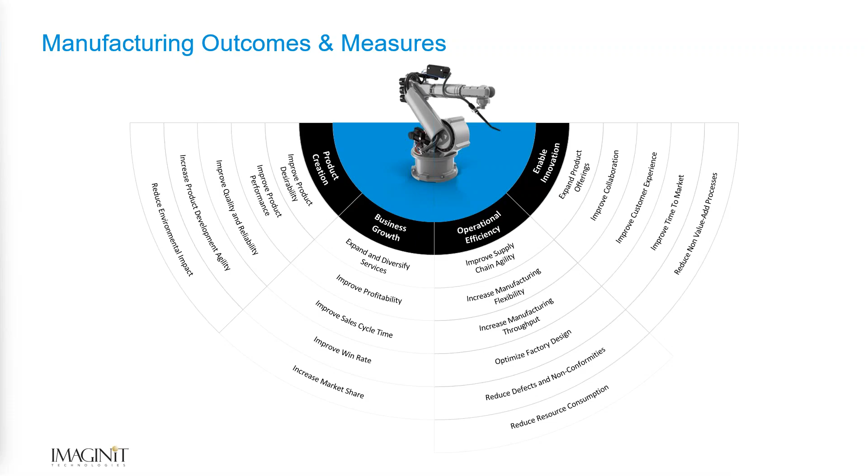All right, I have two more things, and then I'm going to turn it over to Tim. He's going to get into some more fun stuff and show you some real world examples. But the one he's going to walk through is WireCrafters.

So let me just give you a little background on them first. I'd say the ability for companies to transform has really knocked down all the barriers. It used to just be really big companies that could do that, but now those barriers have really been knocked down. WireCrafters is not a huge company, but they've invested in a digital transformation pretty much front of the house to back of the house to stay a market leader.

And they're not a huge company, but they're a mighty one. They are so good at what they do. And for them, their pressure was they had to do several hundred quotes per week with a relatively small team.

Years ago we had built them a 2D AutoCAD-based system. They outgrew it, so they needed a new way. Their goal was to produce high quality proposals and products while being able to account for many special site conditions. They go into buildings, so there's all kinds of weird stuff that happens.

Their transformation really included standardized engineering tools—that's where we started—for flexible 3D design, fast web-based tools for their sales team, automated manufacturing documentation, and then a web-based configuration and model viewer.

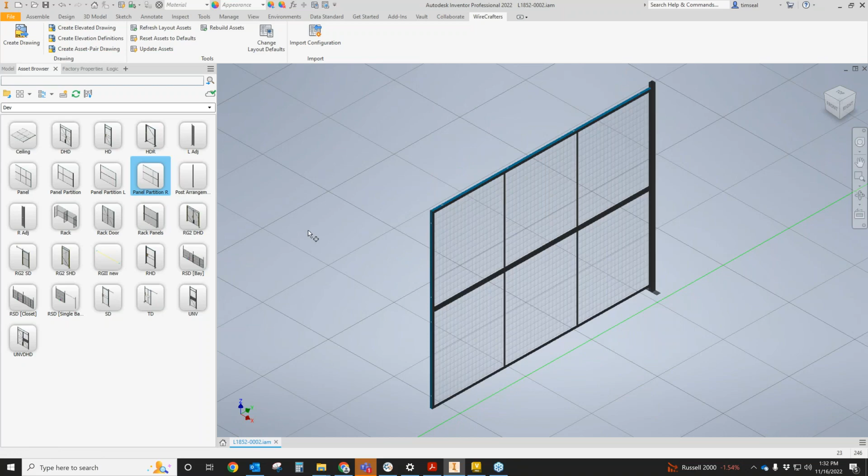So as you can see on the left-hand side of my screen, we have their product line built inside of Inventor factory design utilities. They created a library of their standard components. If you've ever used factory design, it's a simple drag and drop method where I could drop different size partitions into a design, orientate them how I want, and put the next partition in, and they would automatically connect together based off of how the system is designed. I've got a whole library full of different assets to choose from.

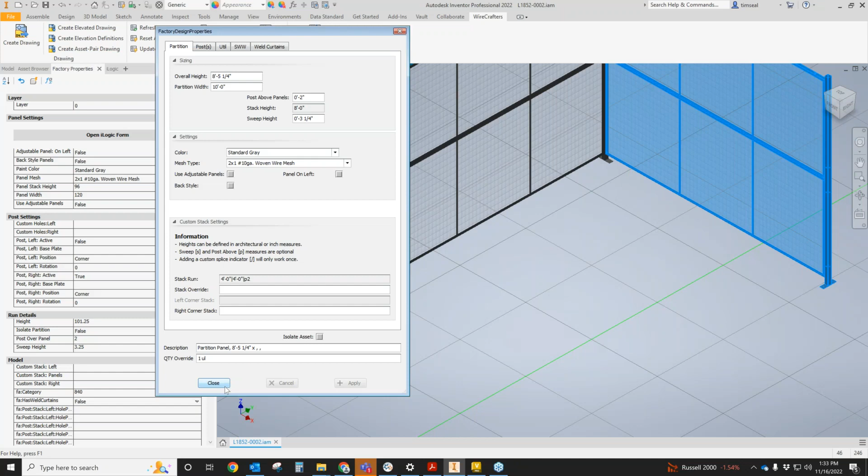Each asset, once placed, is configurable through a form. This whole process is quick and dirty, just drag and drop all the information necessary to build the component or make any modifications I'd want. I can fill out the form, hit OK, and have the designs change on my screen. Then it was a simple process where I could click a create drawing button, click a face, and it would make a drawing for me.

So we spent the first phase of this project basically building up one of their product lines, so that engineering could be quicker and create these takeoffs, instead of making it manually. We actually have a button, which I'll show you here after the web configurator part of what I want to show you.

It would automatically create this takeoff. Part of the process of creating the takeoff, not only did someone manually create it, but they had another person that had to check it. So from start to end, once something hit engineering, it was a week - 5 business days was considered a quick turnaround.

With 50 orders a day, processing 1 package a week, you can see how that could really affect lead times and be a really slow process. So again, we actually built the engineering front end up first - consider that like the engine we can use to produce packages. We turned that 5-day process down to, at tops, half a day. When something was created, a drawing was produced, and you hit a button and the engineering takeoff was created.

The next step of our process was to build a web tool that their national sales team could use, instead of making hand sketches and then coming back and manually entering a quote inside their ERP system. We created a web-based tool where all you need is a login and you have a quoting tool.

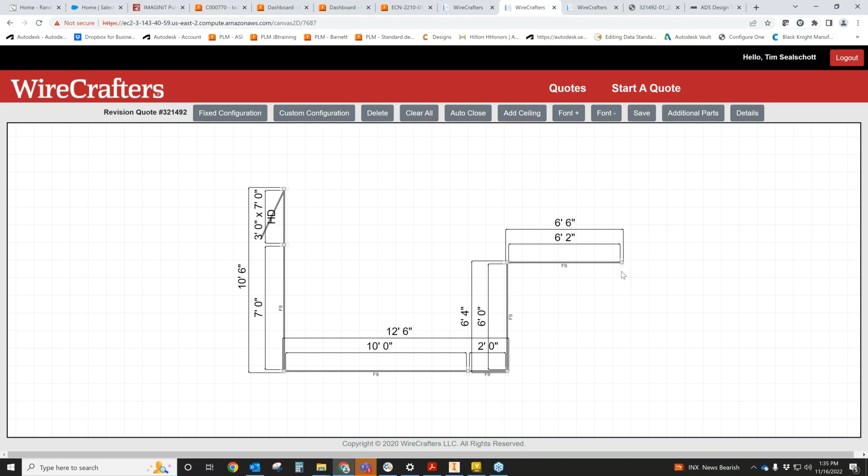So I could come in here, start a quote, and it goes into a layout mode where I've got tools to build a plan view of what my layout should look like, and quickly modify it by clicking on different areas and adding on to my partitions, like adding another partition, another door, or a wall. I've got ways to create standard configurations like box shapes or L shapes, depending on how you want to create those different shapes.

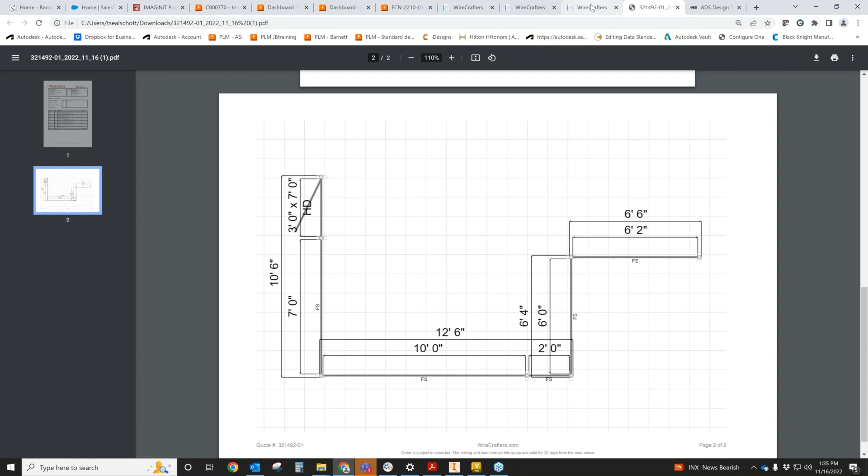From the layout, I'm able to generate a bill of material based off of that layout, and I'm able to download a quote. Based on the information, it quickly creates this quote and gives me a little snapshot of whatever the layout was, along with the ability to download what we call engineering data.

Not only is this quote created inside this web system, it's actually integrated with their ERP system. So as they're entering this information, it goes into the ERP system. If that quote becomes an order, an engineer can come to this tool and download the engineering data, which is just a text file - basically the recipe of whatever that item was when it was quoted.

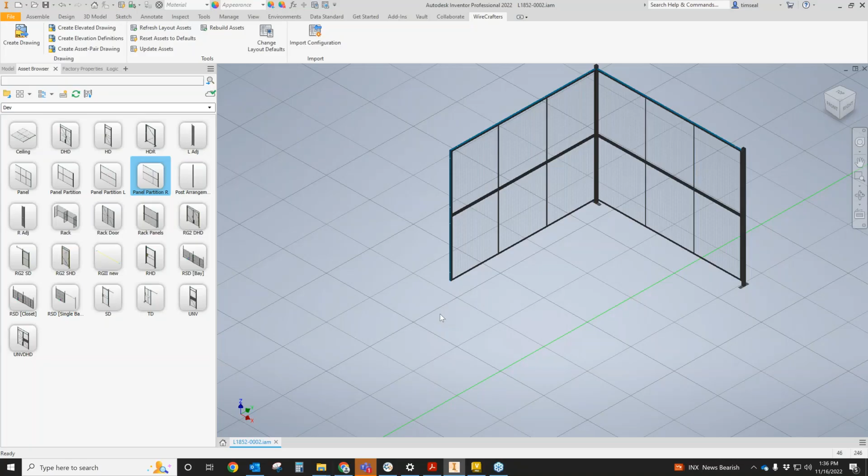From the Inventor standpoint, we built a little plugin inside of Inventor where I can import that file. The layout is just a text file - it's the formula that'll quickly go ahead and design, lay out, and draw the partitions for me with whatever the design criteria was that was inputted from the quote.

Everyone knows that something that's quoted may change or need to be revised a little bit. So we've got tools in here, like I showed you before, where I can come in and quickly edit. Let's, for example, change the width of the door - instead of it being a 3-foot wide opening, we'll make it a 5-foot wide opening.

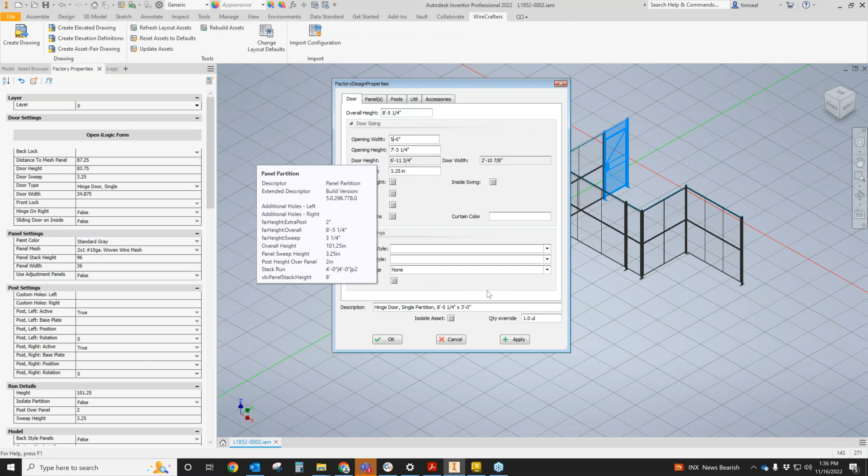We may need to add another panel to the corner here for their design. And then that needs to be a custom.

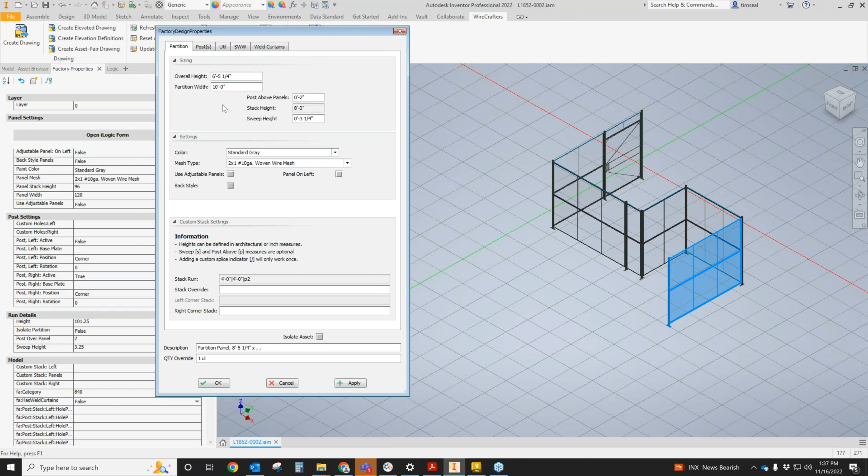So basically when we drop these things in, we call these stock sizes, meaning it's something they actually inventory and store on the shelf. So any changes we make to the system, they consider that to be non-stock, and there's got to be some customizations made to it. We want to keep track of those and add them to our takeoff sheet.

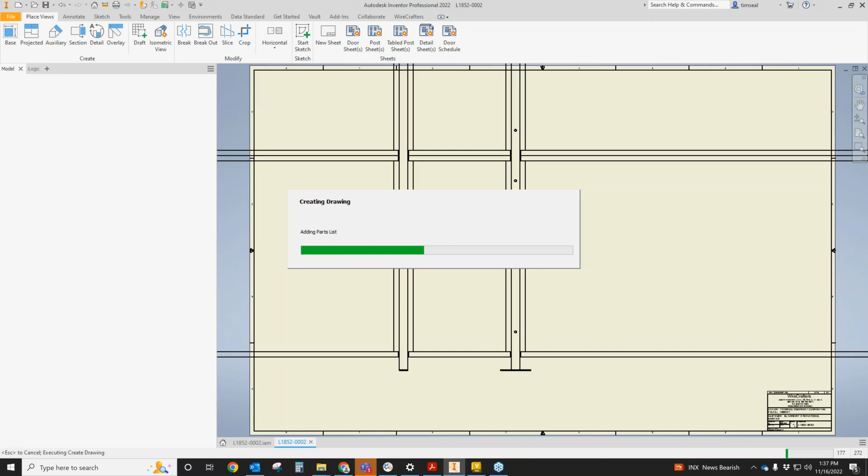So now that I've got my design pretty much completed, I can quickly create a drawing of it, pick a face that I want to use as my front view, and our automation actually goes out and creates a new IDW with a customized bill of material of stock and non-stock components, an orientation or plan view, an elevation view, an isometric view, all fully dimensioned and tagged, ballooned if you will.

And then we have the ability to come in and create some custom drawings. Like maybe we want to create a door schedule, so that'll automatically add a list or a schedule of all the doors in my drawing.

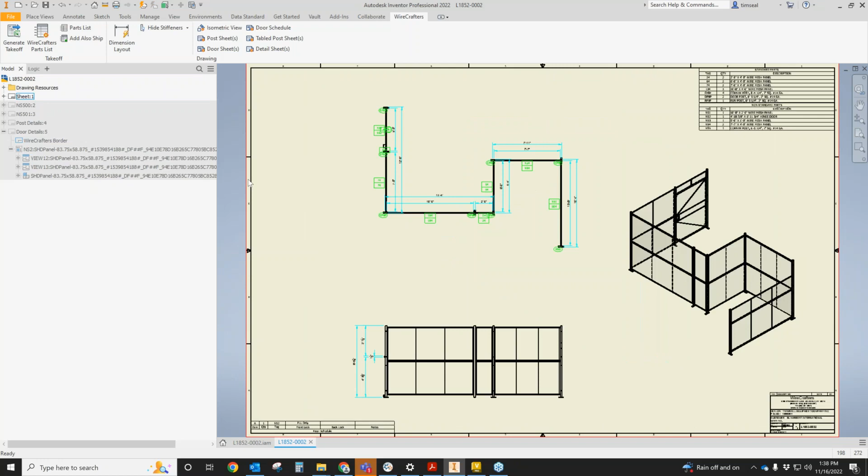I can create detail sheets of anything that's non-stock in my layout, anything that's non-stock of my post, anything that's non-stock on my doors, right? Fully dimensioned layout, fully dimensioned, bills of material for non-stock and stock items.

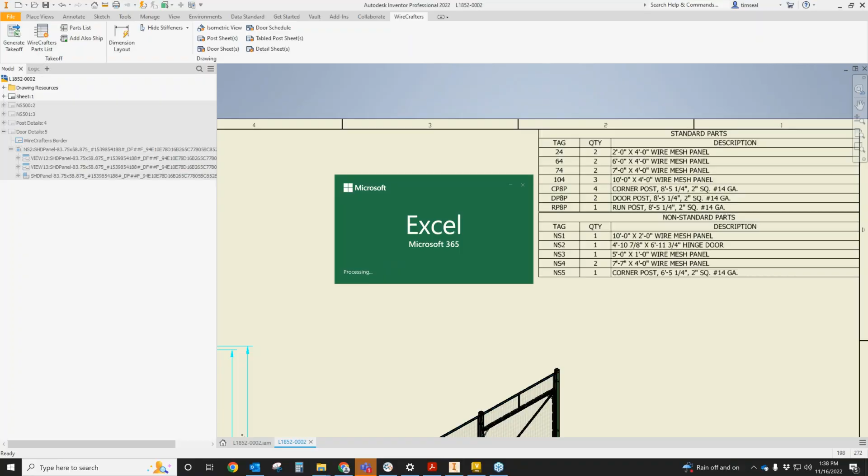And then the real big improvement that we made too is this whole idea of creating this takeoff sheet. So with one click of the button, based off of all the metadata that we stored inside of our libraries and our system, we're able to extract that information.

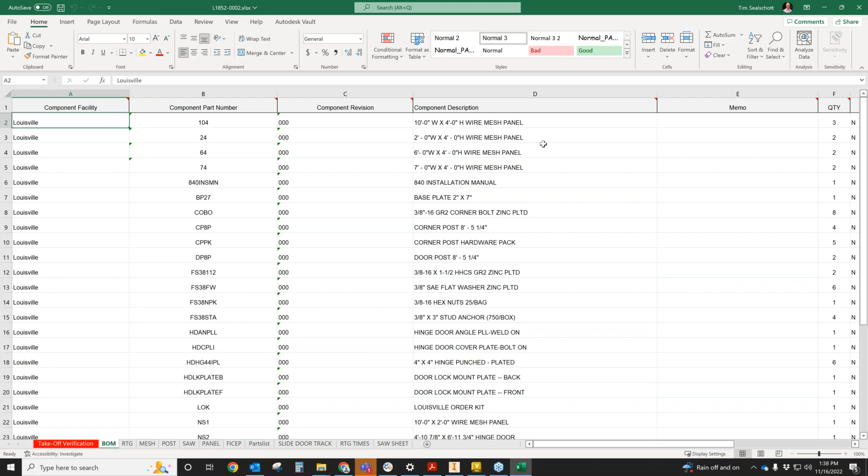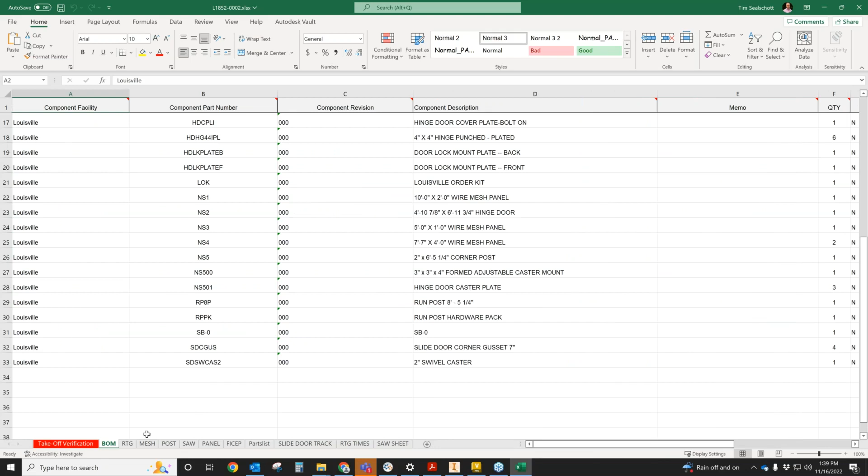And they used to build this thing manually. Just picture this, right? So here's our bill of material with all the components necessary to build this layout. And like I said, with extra hardware or installation that may not even be in the model, but we've actually got it configured so it shows up, along with weights, quantities, group codes. All the information necessary for that packing list.

We create a little routing sheet, so on the manufacturing floor we can kind of estimate the amount of time it should take and what needs to be built for each one of these operations. A list of all the custom mesh sheet sizes that need to be cut for this layout.

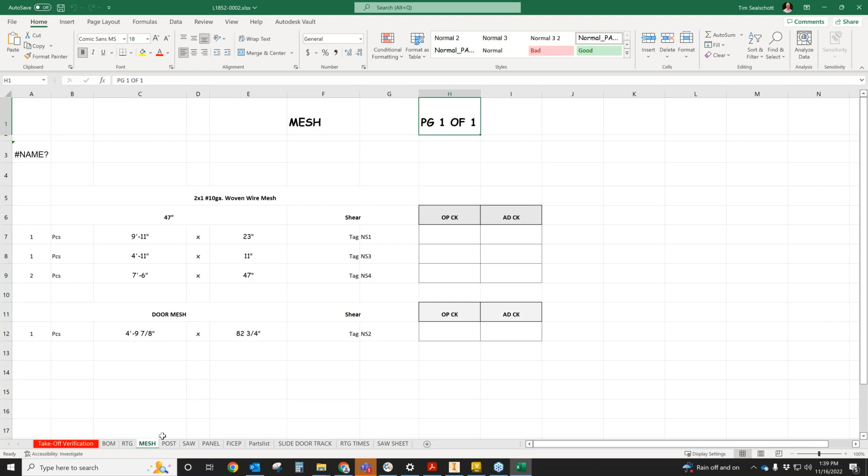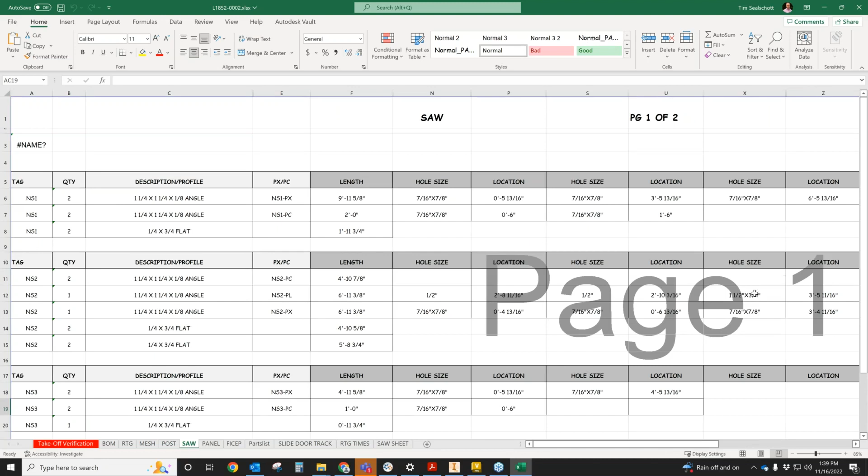A list of all the custom posts, which need to be cut and drilled for this layout. All the structural steel shapes for each custom partition, so you see all the angles and what needs to be made for all the non-stock components, plus where their holes go and what their hole sizes should be. And then a bill of material for each non-stock panel.

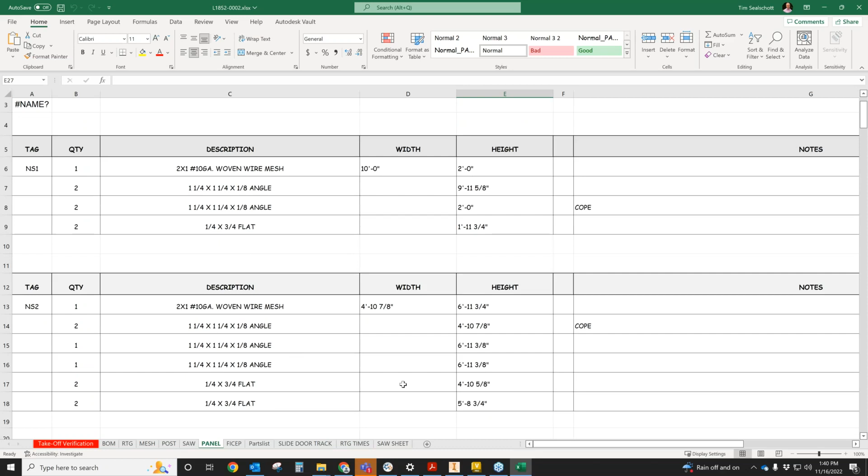And then we basically create a little summary here, a saw sheet that has all the different things that need to be created, that a person on the manufacturing floor, after they build these, can just put this out and make a check next to them as they complete things.

All right, so all this used to be done manually. They used to have to check things after someone actually made this - a week, 5 business day turnaround. We basically shut or trimmed that down to like a max, it would have been a 4-hour process.

So the net of this, right, combining all those procedures and automating them all together - that's the other key aspect, is that we tied all these areas together. They're experiencing a 40% decrease in the amount of time that engineering has to spend making these drawings. And the reason why it's 40% is, right, we've only got a certain product line automated.

So part of our ongoing process with WireCrafters is that we're actually building more and more of their product line into the tool. So we're tracking all the orders and jobs coming through engineering, how many we can actually build with the product, and expanding the amount of projects we can build for the product line that they're actually quoting. So it's an ongoing, continual improvement process where we're increasing their productivity year over year, week over week, month over month.

So I hope that was a good explanation of how we automated the digital transformation process for our customer WireCrafters.

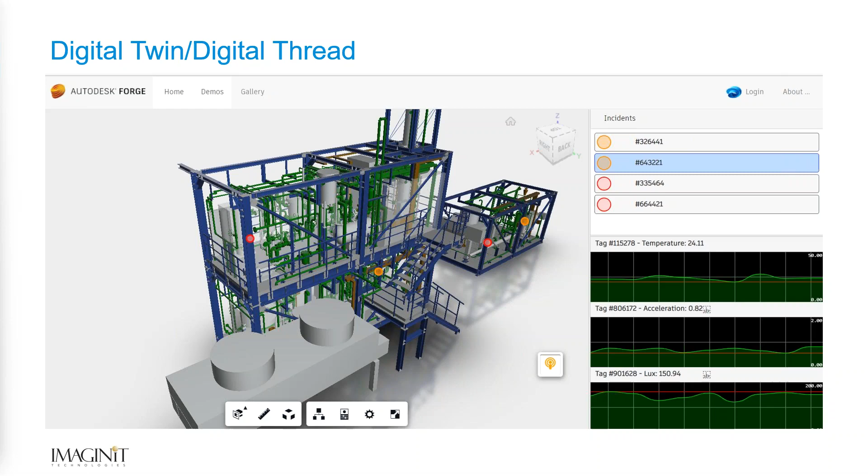So Jason, if you go to the next slide, please. The way we look at this as an organization, as IMAGINiT, we take a look at all the different threads of data that come together to create a model, in a sense. If we look at a digital twin, it's a representation of the physical world, but the data that encompasses a digital twin comes from all different types of systems throughout the organization. How best to connect that data is a challenge without replicating the data between the systems.

So we have all sorts of different tools and technologies to map out these processes and connect the data streams more efficiently than we had in the past. A lot of it is around the Autodesk platform that we deal with, but we also deal with other engineering providers or engineering services out there that aren't necessarily Autodesk related—in the asset management world, the Maximo world, or whatever the case may be, ERP systems. We need to figure out better ways to integrate the data instead of re-entering or recreating data over and over again.

So, looking at this picture, there's lots of different ways users want to be able to use systems. And I always say, put yourself in the user's shoes, not in your shoes. What you may find valuable might not be valuable to that person who's wearing a set of gloves and can't navigate a computer on the factory floor. How do they need to be able to see the data? What's the most important data for them to see? How do they monitor it? How do they interact with that system in the most efficient and feasible way possible?

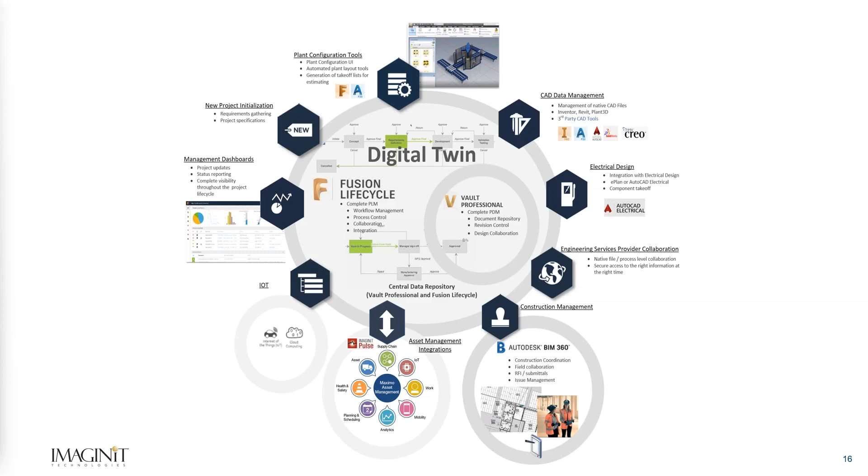Jason, if you go to the next slide please. So there's two key concepts in a digital thread, and the example I just shared is: you design a system, you construct that system, then you create as-built drawings of that system because it's likely a little bit different than it was designed.

Then we need to figure out ways to connect that digital and physical world. That's the sensor data being collected by some system tied to the engineering or as-built model that an engineering service provider, construction company, or installation company provided, then monitoring those systems and leveraging the data so you can learn from history, learn where part failures are happening, and provide insights through reporting systems like Power BI. The point is to connect the data in an easy way, make sure it's streamlined so that the person collecting the data on the as-built side captures the sensor information, serial number, barcode, QR code, whatever it is, and ties that back to the model so we can monitor the progress or usage of that piece of equipment.

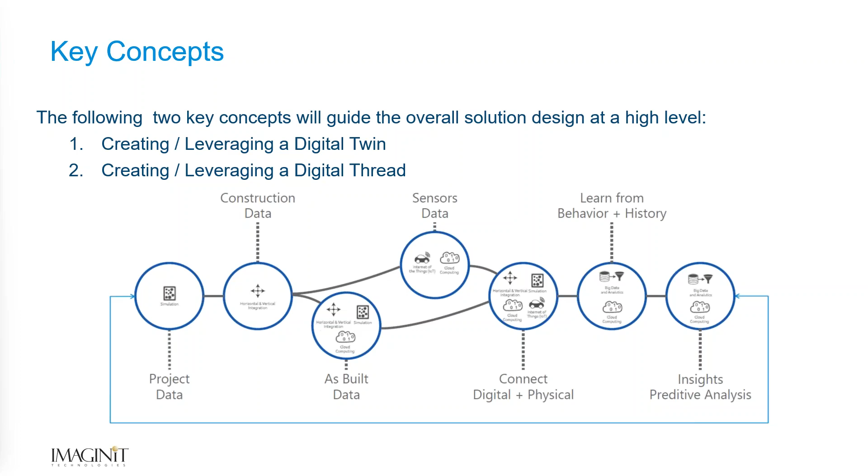Next slide, Jason. So if you look at digital twins and digital threads, this is really the way that I like to look at it, and the way we look at it at IMAGINiT. It's hard to do everything at once. So if you do a digital thread from a product standpoint, like Tim's WireCrafters example, that would be on the parts, pieces, and assembly side of this hierarchy.

But those parts, pieces, and assemblies are created or manufactured in a building or a factory somewhere. So there are hierarchies if you break down your systems within your organization, to figure out which areas are going to bring your biggest value. In WireCrafters' case, it was figuring out ways to sell more of their products.

In some other cases, and Owens Corning was an example Jason used earlier, and other factories, maybe the business impact is greater in managing the data created through the construction process a little bit better, in a way that they don't have to pay for an engineering service provider to come back in and resurvey the building to relay out a new line or do an equipment swap out.

So how do we have accurate data for any remodels we're doing, any retrofits we're doing, any equipment swap out we need to do, so that we don't need to hire somebody to come back in and rescan the facility and then do engineering drawings? How can they just build those engineering drawings right from our as-built drawings and specify new equipment, simulate new processes related to that equipment, so that we know our factory floor is running at the best efficiency possible.

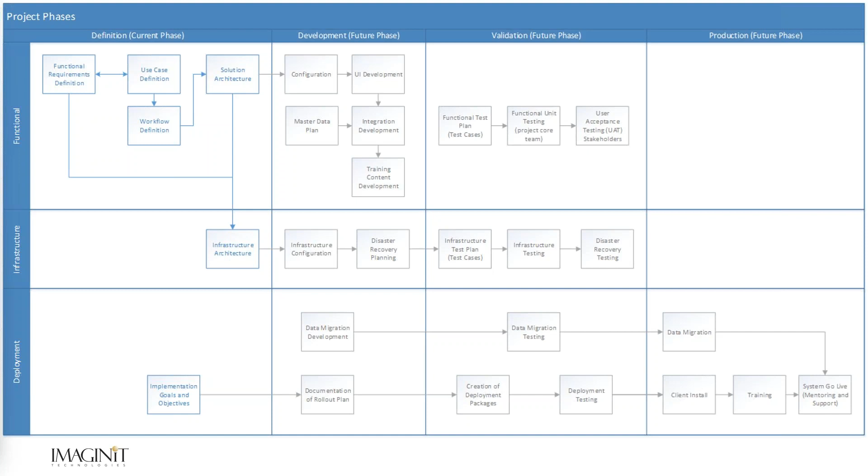And I'll leave you with this: for more information on this topic, our main enterprise architect, Greg Dorman, has recorded an on-demand session, and if you want to dive deeper and get the view on how to get started, I highly recommend viewing his session. I believe Lori pasted that in the chat window. Greg's been an integral part in many of our successful technology projects, just like Tim and Scott have. That should be in the chat window, and there should be a link to the digital transformation white paper I referenced with Owens Corning.